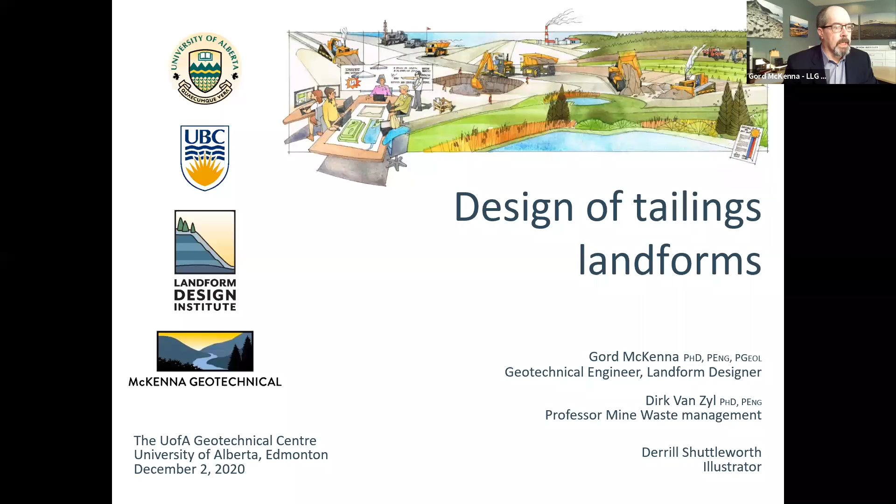But there's also been very, very many more dams. If we go back, there's a couple of moments that make for nice history, and I encourage all of us in the profession to really understand the history and where we've come from. Oftentimes we get a little bit focused on shear strengths and learning our trade, but I think it's important to step back and understand some history. There are some good biographies of Terzaghi you can tap into, for example.

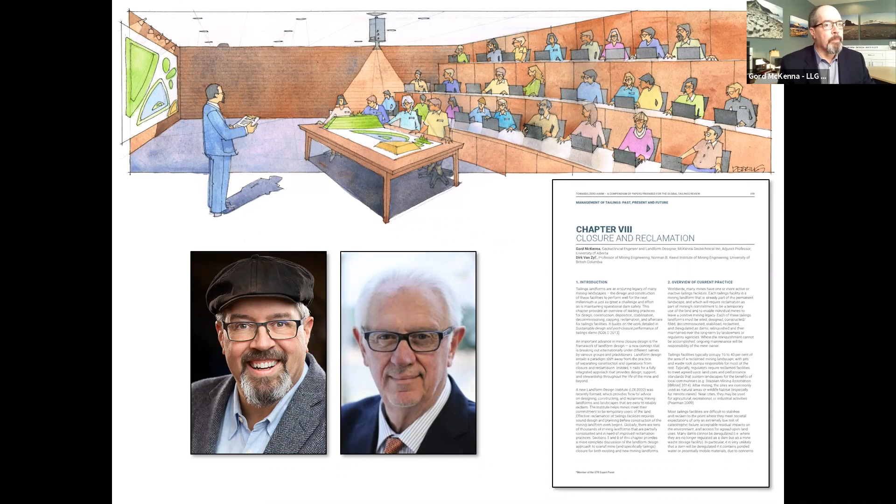When I presented, many of you have been in that lecture last spring, all this before. We discussed landform design in detail, and let me give you a bit of a recap of how this landform design business works. It is an addition to the geotechnical and dam design work and tailings planning that goes on anyway at most mines, and it's crafted to follow Ralph Peck's geotechnical observation method, which you'll recognize from 1969.

The first step is forming the landform design team, shown in the cartoon on the right, a bunch of different ologists and different people. The team's typically anywhere from about 6 to 12 people, includes geotechnical, surface water, groundwater, geochemistry, soils, vegetation, wildlife, ideally includes First Nations work or people on the team, management, mine planners, you name it. It's quite a big group, a little bit unruly. There needs to be a lead designer, a single person in charge of the design.

The second box on the upper right, you establish the governance, and this is often a steering committee, or it might be the mine manager or the chief engineer at the mine overseeing the work. The team creates a design basis memorandum, coming up in one of the slides here. This is the vision, the goals, the design objectives and design criteria, just like we would do for a building. This is also set out for landform design. This has been done since the 1980s, but isn't done for most reclamation. It's a bit of a change.

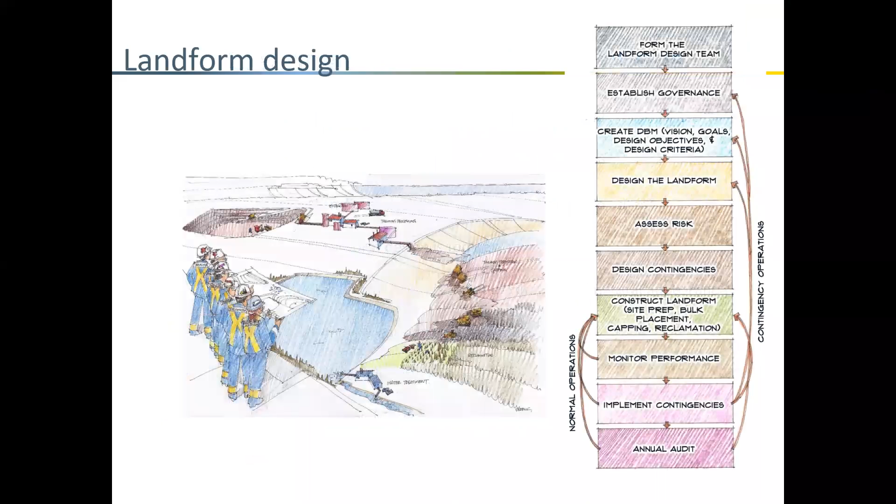There are some misconceptions that have come out over the years about landform design, especially to do with tailings and more generally. The Landform Design Institute is trying to rise to this challenge by producing a report, a position paper in the new year that cleans up some of these misconceptions, according to us. There's a list here of things I've heard over the last couple months, mainly in all this new tailings global initiative stuff.

People are especially interested now in improving their tailings management, and these are the kinds of things I hear from people, mostly geotechnical engineers and mine managers who aren't involved in much reclamation but are keen to learn. They say things like, and I hear this all the time, we only need a conceptual closure plan. We'll discuss this in a couple minutes. For 20 years or so, everyone has taken pride that the closure plan for the mine site only needs to be conceptual, a couple pages, a drawing, a sketch, and that will suffice. But it turns out the closure plans actually need to be detailed enough, and our landform designs, even before mining starts, detailed enough to make good decisions on. We'll discuss how to do that.

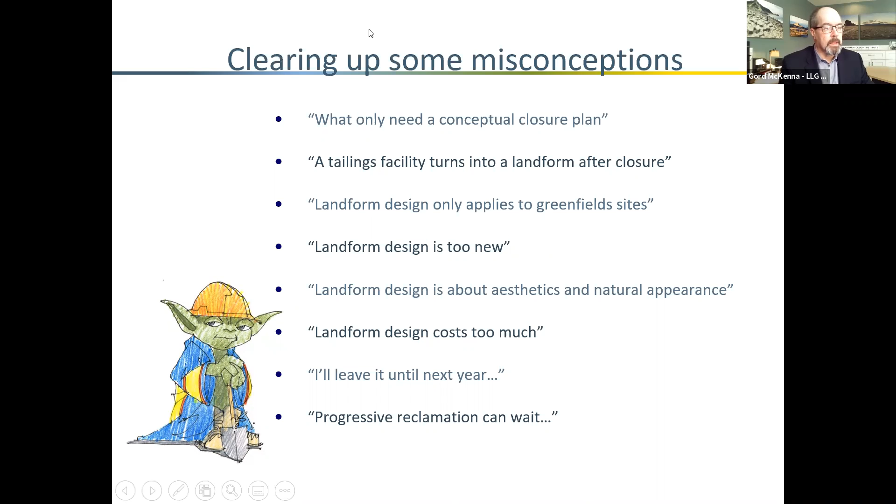The last two: 'I'll leave it till next year,' or progressive reclamation can wait. We're seeing that mines make promises for various things and then typically fall behind in their schedule on that. There are opportunities for deferment of some of the work, but typically you want to set a reasonable schedule and follow it.

Sorry, this was that new timeline that we talked to, I had the wrong slide up. Just leading through the pre-mining, construction, operations, decommissioning, and aftercare, and noting the two vertical bars: the first ore is an actual day, and the mine closure is an actual day.

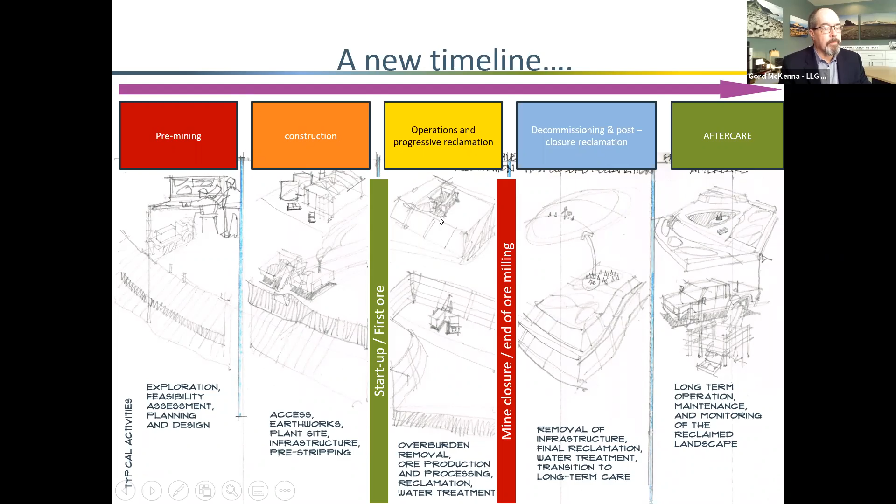So the heart of the talk today is providing how-to solutions. The Landform Design Institute was formed largely to provide how-to. In doing that, we'll be putting together several publications a year and providing case histories and different things amongst each other, with a real focus not on what to do, but how to actually do it. It turns out there's lots of guidance available over the last 10 years or so, kind of at the 30,000 foot level on what to do, but not very much on how to, and sometimes mines and practitioners struggle with the actual details. So here's 18 sort of problems and solutions.

The first of the problems they're faced with in tailings landform design is that we don't have a clear plan. Oftentimes the geotechnical people and the mine planners and tailings people essentially build the landform, do the dam design, do the construction, and then it's left for the reclamation people to kind of clean up and remediate at the end. This is what happens at most mines.

There'll be a closure plan, so they know where they're going, but the design of the final landscape is not done. So the opportunity here, if you don't have a clear plan, is to design your closure plans at the pre-feasibility or feasibility level.

These are mining terms for levels of design. So not a conceptual closure plan, not just what Derrill has drawn here for a tailings pond with a little wetland in it, but a full-on engineering design at the pre-feas or feas level.

This is important for mine economics, and for bonding and financial assurance, making sure you've got enough soil to do it, making sure people in the community and the regulator buy into the vision of what you're trying to do, and doing enough design that any fatal flaws become apparent right away and can be worked.

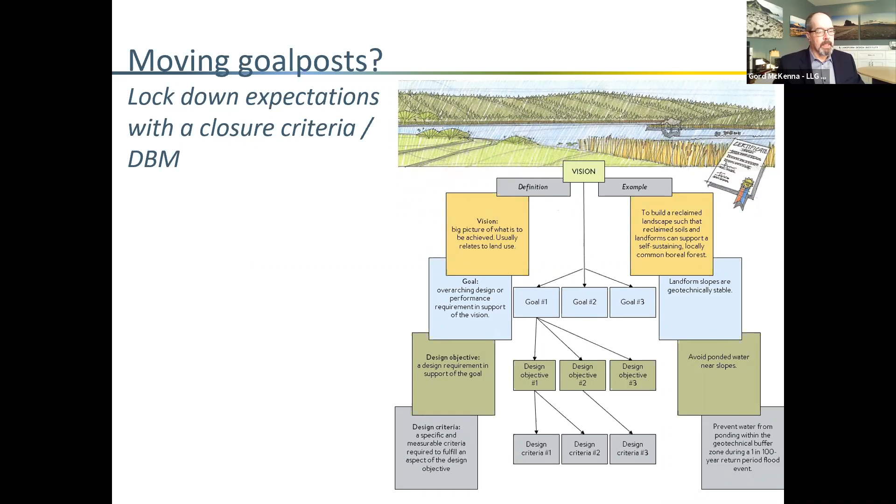One of the ways, in a design objective, is to avoid ponded water near the slopes. Geotechnical engineers hate ponded water, especially near slopes - it might get into a crack and blow out the slope, all those kinds of things. So our objective is to avoid that in support of being geotechnically stable. Then down to the criteria level, we'll design the landform to prevent water from ponding into that zone, and we'll talk about how to do that in a moment.

One of the problems that comes up is mines having difficulty meeting progressive reclamation goals - say 100 hectares per year reclaimed every year for the next 20 years. There's a lot of reasons why they're not meeting that, mostly because it's often preferable to defer costs.

This requires fortitude, prioritization, and scheduling. There's something I'm calling aggressive progressive reclamation, where you work hard, say in your tailings, to make sure the tailings can be reclaimed in a few years, and you don't keep your tailings ponds limping along with just a few cubic meters a year going out there.

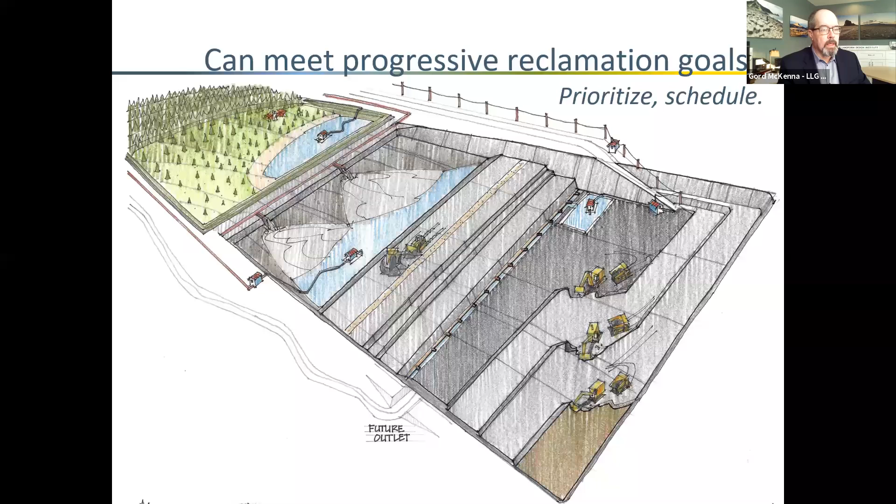You get done, get out and reclaim. The advantages to such a thing is you reduce your long-term liability, but mostly for the design team, you're learning as you're going, you're learning how capping works, you're learning how the trees and bushes are performing, and you can adjust your methods as you go. It also helps explain to the stakeholders, they can come out and see whether they think your reclamation is working.

One of the challenges in landform design for tailings is it's hard for the teams to work together. It takes about 3 years for a team to really gel and get enough cross training so that the biologists know what the engineers are thinking.

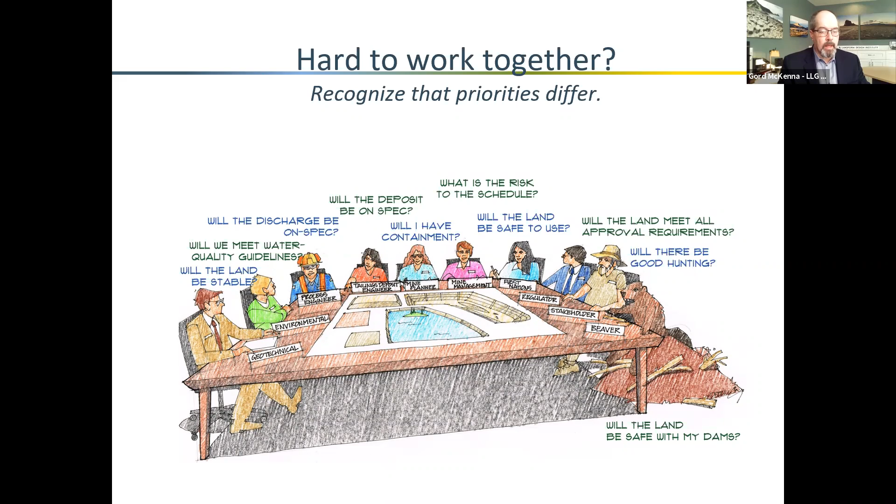The cartoon here kind of shows that the different people at the table all have different priorities. They've got different backgrounds in their training, but they're all working towards the same vision. The geotechnical engineers might be focused on stability, the process engineers on keeping their discharge on spec for tailings, the First Nations want to make sure that the land is safe to use. Each of us comes at this with a different thing, so we need to make sure our design takes care of each of those groups.

Mines recognize they need to work with their communities, but oftentimes they don't know how to engage, especially in something like landform design for tailings. In big mines, oftentimes this engagement is kind of farmed out to the public affairs group, and sometimes they don't want technical people talking to local communities or the regulators.

We tend to promise too much, or agree to things we don't know how are done. But I think we need to have these people right on the design team, helping us make design decisions. And if you don't know how to go about engaging with your community, I'd say just ask them, go for coffee, find out how they want to be involved. Some want to be involved in monitoring, some want to be involved in decision making, some are too busy and just want to be kept posted. But simply going and asking how they want to be involved is immensely rewarding.

Mines often have angst that they can't afford the latest tailings technology. This slide comes out of a 2012 tailings deployment roadmap that I was involved with, and it gives the idea that you shop cafeteria style for your tailings, or for your technologies. You'd use certain mining and extraction technologies that affect your tailings.

You've got tailings technologies like dry stack, filter tailings, slurrying, or co-disposal—all the things you will have heard of. You'll have reclamation technologies, and oftentimes we need water treatment technologies at the end. And then we have to pay for them all at the cashier here.

Oftentimes, and I see this quite often in decision analysis I've been involved with, the tailings technology that scores highest for environmental performance is often the most expensive, and can be 5 times the cost. It can be billions of dollars more for a large mine. So the mines tend to think that's an awful lot of money. But sometimes I'd argue that if you did cradle-to-grave work, as they think they're doing in their assessment, they would understand that these costs may be required.

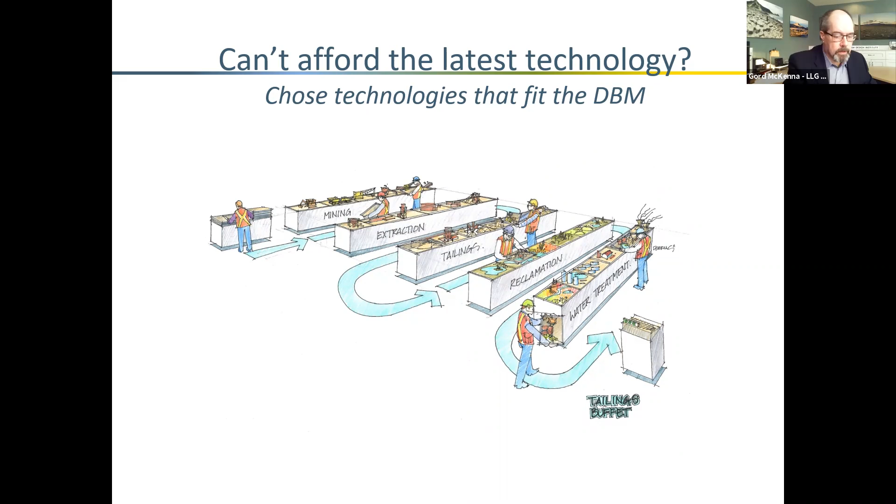One of the main pushes in this global tailings initiative is to reduce the risk of catastrophic dam failure. I think most people would have thought that until Brumadinho, once you get your dam and tailings built and you're done, you've got almost no risk of catastrophic failure. But if we've got semi-stable or mobile materials with rising water tables, it shows firsthand that we can have major dam failures even after closure.

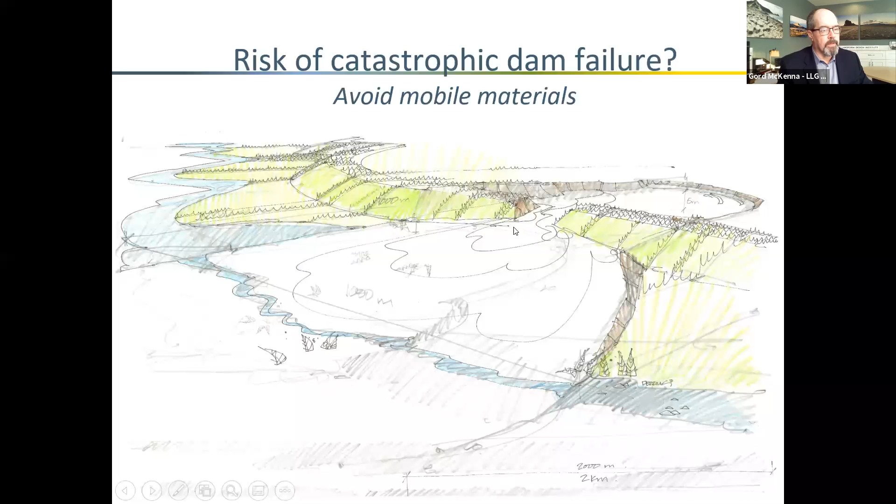So where does landform design come in? Landform design looks at all stages, including operations. If we truly want to reduce our risk of catastrophic failure, we've got to reduce the amount of mobile materials - water especially, but also loose or mud-like tailings - and avoid those mobile materials. In some cases, materials can be stored below grade with geologic containment, and there's very little risk of catastrophic failure there. But we almost always want to start storing some mobile materials above grade behind dikes, and if we truly want to reduce our catastrophic dam failure rate, we need to avoid that situation.

Another curious one that I've spent a lot of my career on: people want to build wetlands and lakes on top of tailings landforms. Geotechnical engineers hate water on slopes, water behind dams in the long term - we sort of take a blood oath to go and drain any puddles that form. But the biologists are saying, no, to have a good landscape we need wetlands, especially in oil sands, but in a lot of other mining environments, especially temperate environments. And oftentimes anyway, there's residual ponds or pools due to settlement or just water collecting.

So the cartoon here provides a tool for you to use. This is written up in the CEMA Wetland Manual from 2012, where we introduced the notion of a geotechnical critical zone and a geotechnical buffer zone, shown in the red dashed lines on the slide. In the critical zone - these are just constructs - we never want to have any water ponding. So we're going to do all that we can in that outer zone, that even major storms or long-term wet periods, that we just can't have any water ponding near the dike crest. To do that, we have inwardly sloping slopes - we build it up, we make sure that there's just no way that if the pond grows, it can flood into that zone.

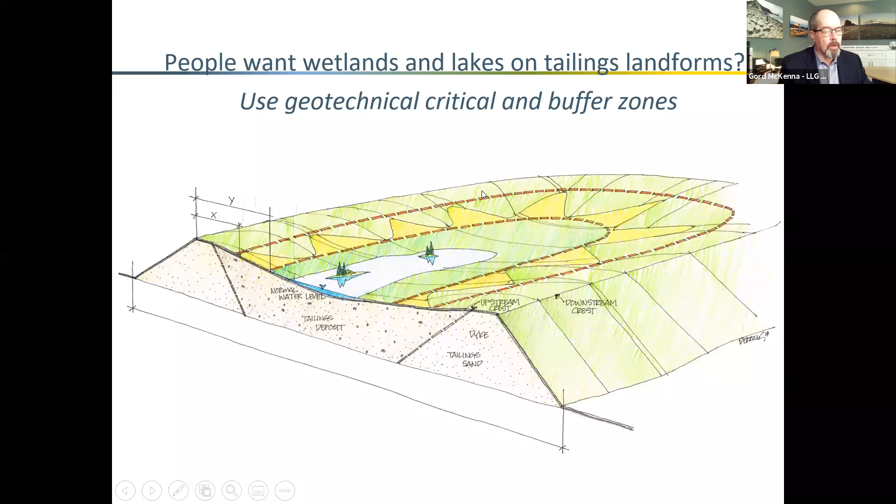Soft tailings, some of you'll know, is one of my favorite things to work on. Soft tailings are those tailings so weak that you can't get out with them using normal mining equipment. It's a term I coined back in '99 when we started working on soft tailings at Syncrude, and we had a great big conference in Germany with about 100 people from around the world, each with soft tailings problems. I think we're coming to the point where we really ought to avoid producing soft tailings. I know some of your research will involve paste tailings or co-disposal tailings, but stuff that's hard to traffic and potentially mobile is pretty tough, so we should be trying to avoid or minimize that as much as practical.

Sometimes it's not practical. The cartoon here shows 5 or 6 ways of capping soft materials, and these require people to write big checks. It's typically about 10 times the cost to cap and reclaim soft tailings versus reclaiming a tailing sand beach. Oftentimes these soft tailings cost upwards of $1 million per hectare to stabilize and reclaim. So you need to be able to write the checks. We can do it, but it needs to be designed in from the beginning.

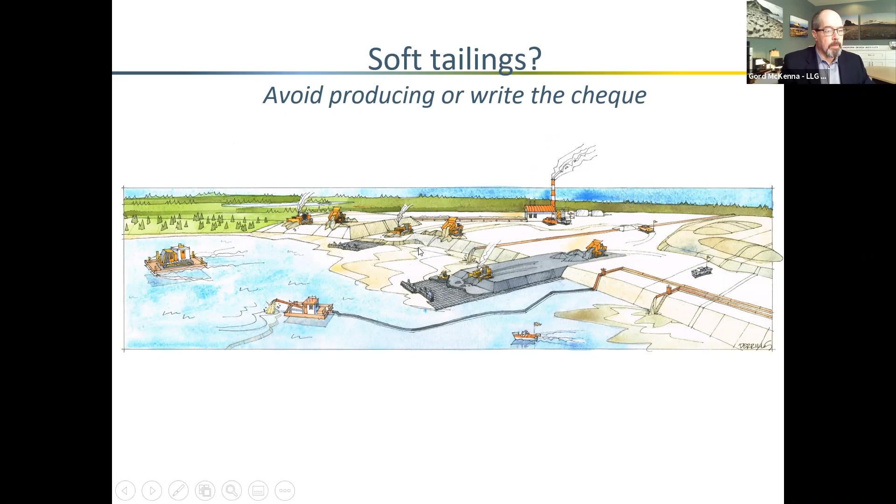We're about halfway through these problems and solutions.

The next one is on Nilsha Slingerland's work. Here are pictures from her thesis on sand dam erosion. When I was doing my original research at the U of A in 1996, I went out to about 77 mine sites around the world, and have added to that, numbers up to about 110 now. I noticed that tailings sand dams, which are one of the hallmarks of the industry, are really difficult to reclaim, especially the downstream faces, especially stopping erosion.

Typically we put 20 centimeters up to 1 meter of cover on and vegetate it well. That's not too hard to do in the boreal, but it's quite difficult in the semi-arid and arid parts of the world. In some cases we promise zero erosion, in others we promise erosion similar to rates in other areas. If you get a gully through your cap into the tailings sand, which is usually a non-cohesive silt or fine sand, the erosion is really strong.

So it's not really clear that we can reclaim these well. People have had a certain amount of success - sometimes it works out better in practice than in theory. But where Nilsha has really contributed is with her work on modeling the erosion.

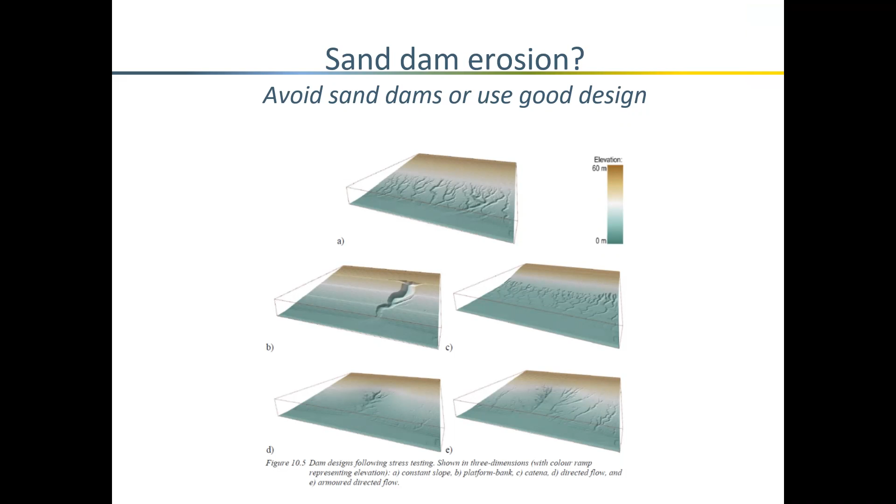She also looked at putting in drainage and other features. So the answer to the sand dam erosion concern is either to avoid sand dams and build them more like rock-fill dams or earth-fill dams, or to use good design on your downstream faces.

Next slide. We worry about the longevity of the landform and typically don't declare what we're doing. I'm going to offer up that we should declare a service life, and there seems to be some consensus for tailings being a 1,000-year service life. We used to promise they'd be good until the glaciers came back someday, or good forever.

If you wanted to apply your engineering or geologist stamp to that, that gets pretty tough pretty fast. In the United States, the uranium mine tailings capping work done in the 1980s, they said, we'll design this for 200-year service life. We'll have an eye out to 1,000, but we'll only promise 200.

And they end up putting huge riprap, crushed rock and boulders on top of their tailings facilities to limit erosion, making them pretty much useless for anything else. And even then, it wasn't always successful.

But where we get into this debate is as we put the tailings out, the tailings particles will tend to weather and change. We'll get water flowing through the system, which may clog some of the internal drains or cause issues with precipitates or biofouling. If you've used geotextiles, they wear out over time - even bituminous membranes likely have a service life.

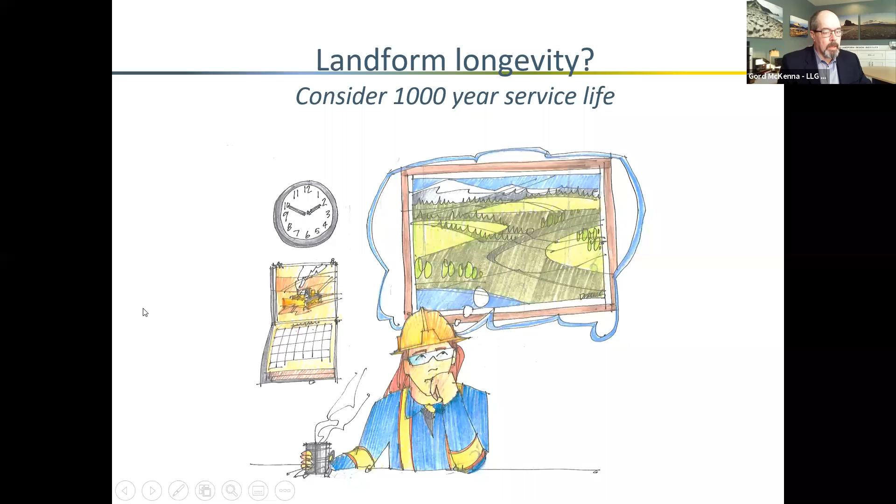If you're worried about long-term erosion, like Nilsha's work has shown, Haley Schaefer has picked that up at the university and is taking it to the next step, looking at the long-term performance of dams. If we can settle on a finite service life - and I think it's emerging - 1,000 years is coming out as the number. Some work on why 1,000 years is a good number needs to be done. Maybe it's longer, maybe shorter, but what can we reasonably offer up as a design team?

Climate change is a big deal for landform design. I used to ignorantly think, well, we're designing for the PMP and PMF anyway - what does it really matter that we're going to get bigger storms or more or less water over time? We're already designing conservatively.

There's so many things that climate change is affecting. Nilsha's work highlights it nicely, where her erosion modeling showed that if the area got drier with time, there would be almost a tipping point where the vegetation would change and wouldn't prevent as much erosion. All of a sudden you'd have 5 times as much erosion as you would have had without climate change, at least according to the models. There are a bunch of tipping points we're finding with earlier spring melts, lack of ice, lack of frost, all sorts of things coming up in global climate change.

So miners are finally, in the last few years, recognizing this, and we're learning how to build it into our landform designs. I've been hinting at this a couple times in the lecture: the long-term longevity of internal dike drains.

Years ago, we would almost always put a great big gravel drain underneath the toe of our dam. Casagrande shows us how to figure this out analytically. Had grad students run all sorts of cases in the 60s and came up with the plan for toe drains and triangular toe drains, blanket toe drains.

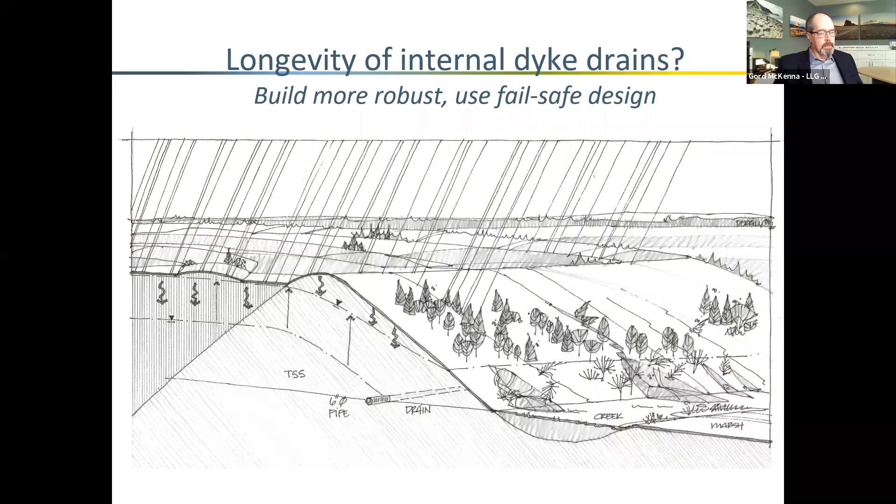Or use a fail-safe design such that you can reasonably assure yourself that even if the drains fail and the water table comes up sometime in the future, you still have adequate factors of safety and that there won't be too much erosion or poor material getting into the soils at the toes of your dikes.

Getting on to poor seepage water quality — usually tailings pore water quality is pretty lousy at most mines. Oftentimes there's acid rock drainage, elevated metals in that. Tailings seepage tends not to be as bad as waste rock dump seepage, because tailings tend to be less permeable and emit less water, and can usually mostly control the oxygen getting into them, so the acid rock drainage is not as bad.

But in some sites it dominates, especially where we built the tailings down in river valleys on top of old rivers and the aquifers that creates. So what is a landform designer to do with managing poor seepage water quality? Well, there's a bunch of different strategies here that come up every week in my practice.

Except for the first one — improve process water quality. Most landform designers, most geotechnical people as well, think that whatever the water quality coming out of the mill is, that's just what it is. There's nothing we can really do about it. There'll be reagents left over, whatever you've picked up from the mine and the acid rock drainage and all that kind of stuff. But actually, we do have choices.

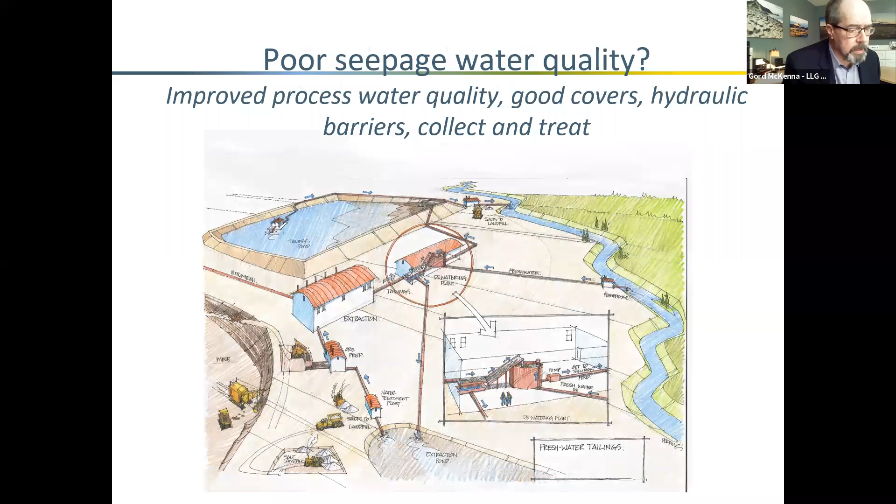Getting down to the last couple slides here and approaching the top of the hour.

It's safe and stable. A lot of mines, though, don't have bedrock. They're either in tropical areas where there's deeply weathered bedrock not fully resistant to erosion, or they've built up ring dikes or other facilities built out of sand. Now we're faced with putting a spillway down the slope of a dam made out of sand that likes to have piping, and that's highly erodible. Here it's supposed to pass typically the probable maximum flood. These spillways can be 50, 60 meters wide in design, 10 meters deep, a kilometer long, pretty tough.

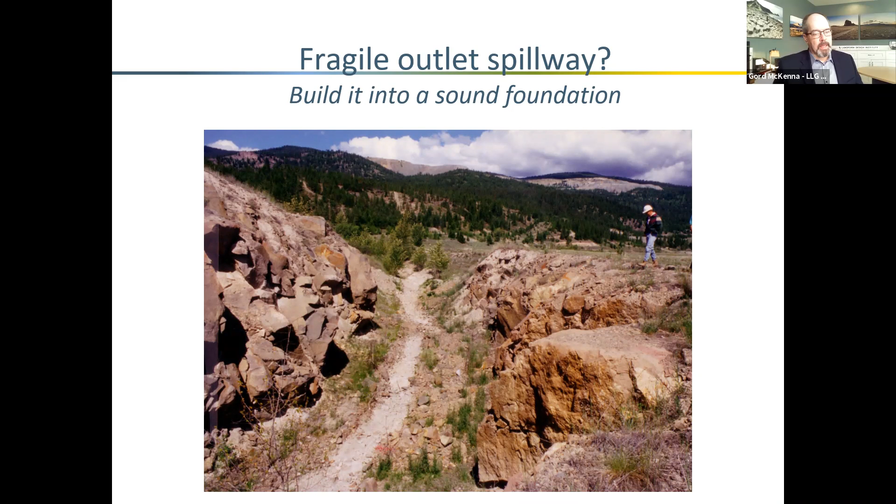So one of the how-to solutions is either make sure you've got some bedrock nearby, or during initial design, choose your outlet location to make sure we don't have tailing sand right in that section where we want the spillway to go. Could we build it out of clay or something compacted to 100% modified Proctor, a good dam section all the way through, so there's just no potential of erosion out of your fragile spillway.

It's really tough if not planned in advance, and it's not quite clear. The regulator in a lot of cases will sign off that it's no longer a dam, that it's just turned into essentially a mine waste facility with no chance of a catastrophic breach. But there is guidance on how to do this, and it's being tested around the world, and it is so much easier if you've designed it from the beginning. Managing your liability into the long-term. Most miners, I think, still think that they're going to walk away from their sites, that they'll build them robust enough that they won't need any maintenance for the next 1,000 years. That's pretty much a pipe dream.

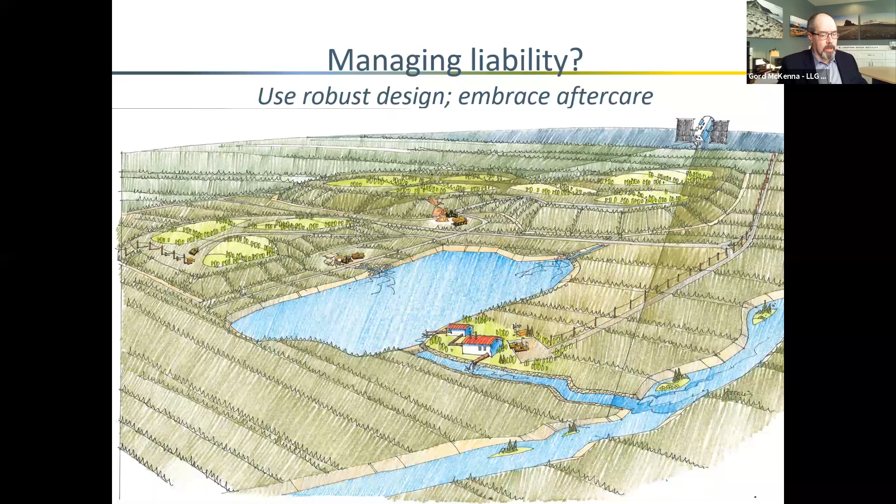Mines will be taking care of their sites, at least to some level, for years to come. So let's try to minimize that rather than eliminate it. Use really good, robust design and embrace the aftercare. Daryl's picture here shows some of the events going on in monitoring and maintenance of a well-built landscape.

Last couple slides here: not enough financial assurance. Almost no mines, when they close, have enough money in the bank to actually go and reclaim. What we find is that the estimates of the bond money held by the government, should it default to the government, is typically about 10% of what it actually costs.

I'm working on the Faro mine these days in the Yukon. Some of you will know about it. The original bond was $28 million. The most recent cost estimate to reclaim that site is $1.5 billion.

So there's two aspects. One is that the cost estimates are usually wildly optimistic, and the government hasn't collected enough bonding even for the lowball costs. A couple solutions for that are working towards getting independent cost estimations rather than just the mines providing them, and more rational bonding requirements so that there's money available. I've never heard a regulator say, don't worry if they go bankrupt, we've got lots of money, we can take care of that. I actually don't know of any mine that's paid for its own reclamation—it's always a sister mine or ongoing operation that's required.